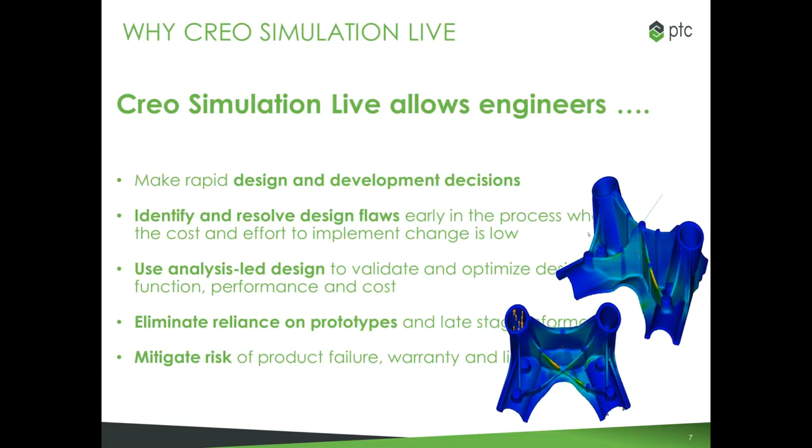What it'll give you is real-time feedback, a very intuitive, easy to use application, giving you structural, thermal, modal capabilities, giving you the ability to simulate and animate these things, see them in real time, which you'll be able to see as Terry delivers the demonstration. And most importantly, it's embedded integral within the Creo environment, but it is leveraging the Ansys simulation technology and power that it provides.

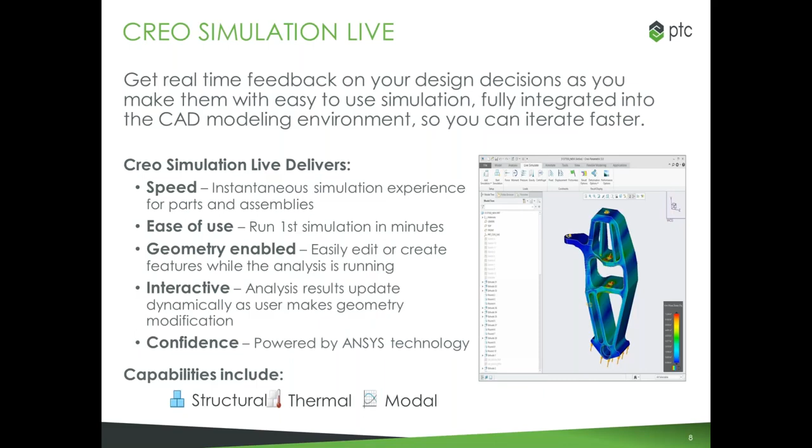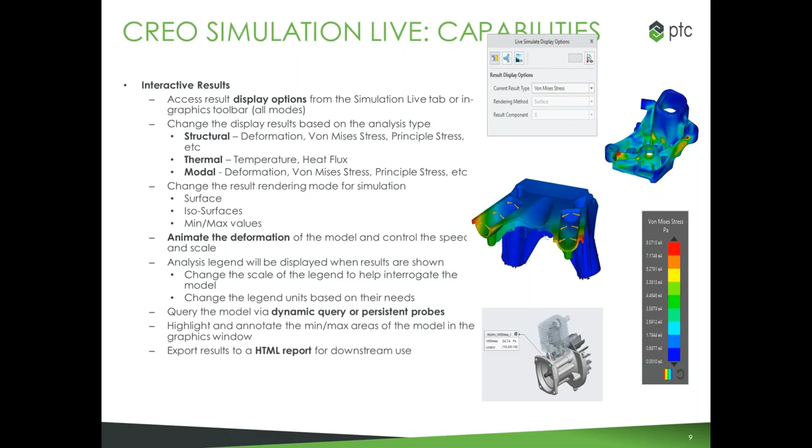I'll just build this slide out at a high level. As you can see here, some of the simulation animations, some of the still photos, but Von Mises stresses and the things that you should expect from a simulation solution capability are part of this Creo Simulation Live capability.

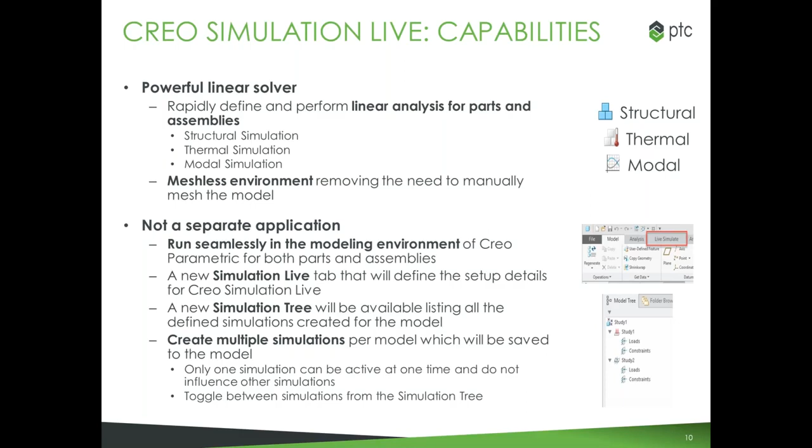It allows you to do powerful linear solving, the meshless capabilities. It shows up as a tab within the Creo environment. So as many of you are designers using Creo today to digitally design your products, you want to be able to seamlessly design your parts, assemblies, models, and go very quickly into Simulate, and then get those results real time, without having to export out or jump into another application or save files. So obviously from an efficiency and speed standpoint, it's critical that it's a tab within the Creo parametric application.

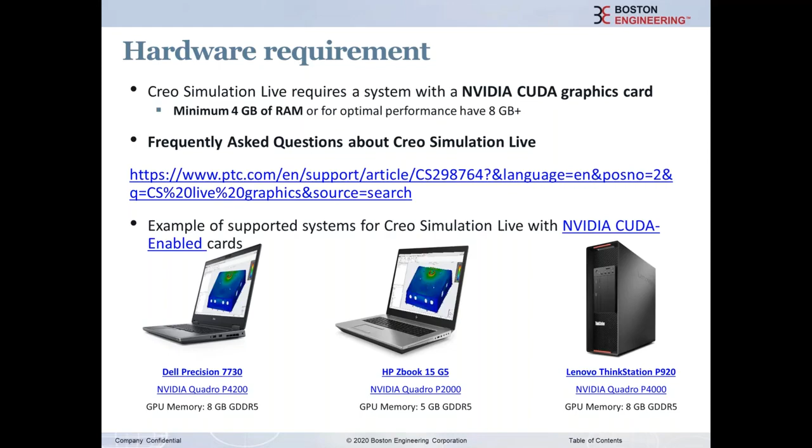As noted before, Creo Simulation Live is the first solution PTC and Ansys have brought to market. It's been well received, with a number of customers using it in production today, correlating simulations back to test data. They see the benefits in accuracy and trust, and it's bringing simulation more upfront into the design space, as opposed to the more expansive PhD-type solutions Ansys provides for customers we support. This is more purpose-built for the mechanical engineer designer.

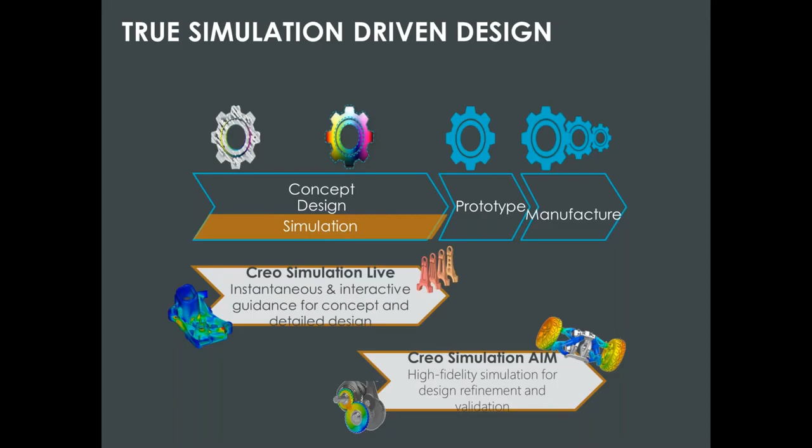Creo Simulation AIM will be coming out. As many of you know, Creo 7 will be released in a few weeks. We're excited about that, and PTC will have new capabilities and extensions available as they continue to deliver more technology. PTC's strategy on simulation is Ansys, so more to come on that.

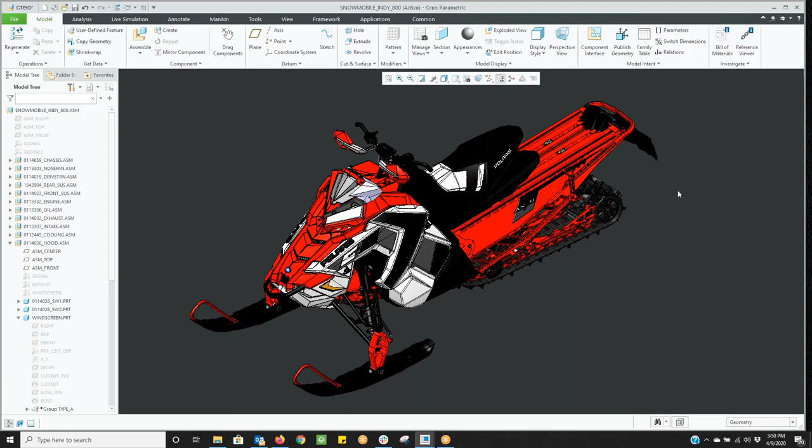We have a snowmobile. Those of us who live in the northern reaches of the world see this quite often. This is the Polaris snowmobile out of Roseau, Minnesota. We're going to go in and take a look at the chassis subassembly, and mainly we're going to look at this sheet metal bracket. We're curious as to what happens if we apply a load on the top of it.

Typically you'd do that with an analysis package, whether Creo Simulate or Ansys, and you'd have to mesh the model and apply materials, loads, and constraints. But I'm going to show you how Creo Simulation Live puts that analysis power into the designer's hands, so he can assist the true PhD analyst doing the full-blown analysis. This isn't meant to replace analysis, but it lets you do what-if scenarios quickly, instead of making a design change, running an analysis, not liking it, undoing it, making another change, and running another analysis, which takes time and effort.

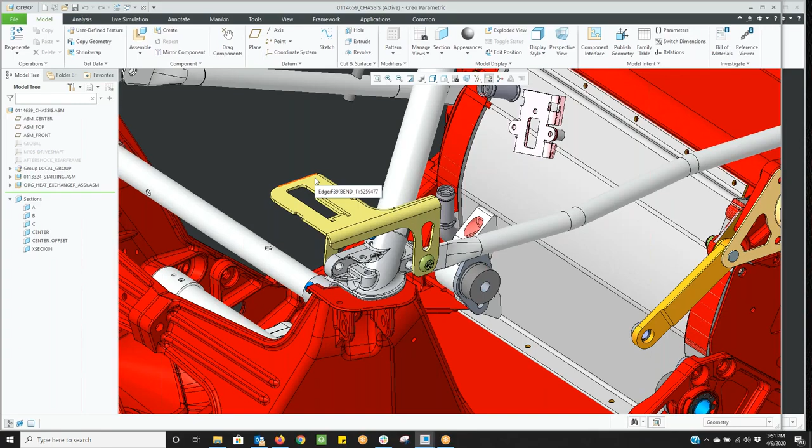So I'm going to open this. This is just a standard sheet metal part created within Creo. The material for this part was set up in the part preparation, so it already has a material assigned to it. As John mentioned, we have a live simulation tab in our dashboard, so we'll click on it, and that takes us into our Creo Simulate Live functionality.

Now if I expand this structure here, notice we're looking for loads and constraints. We need to constrain and load this model so we can get an analysis. If I click on constraints, I want to hold this model the same way it was held earlier, with 2 bolts holding it in at these locations. So we'll go in and fix those, and if I expand my constraints tab, you can see I have my fixed constraints.

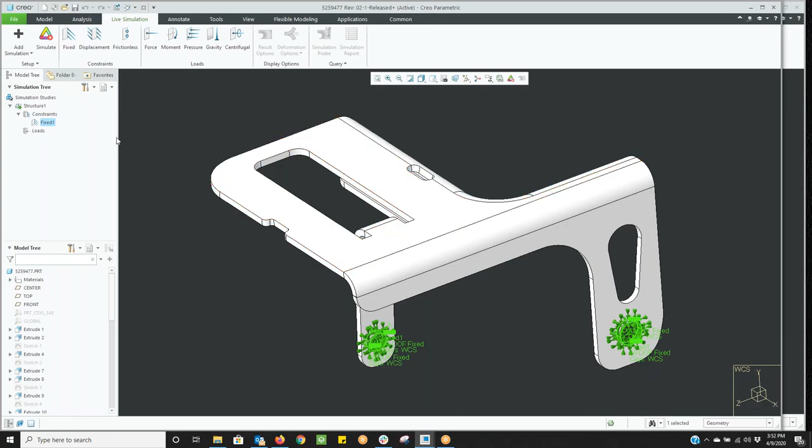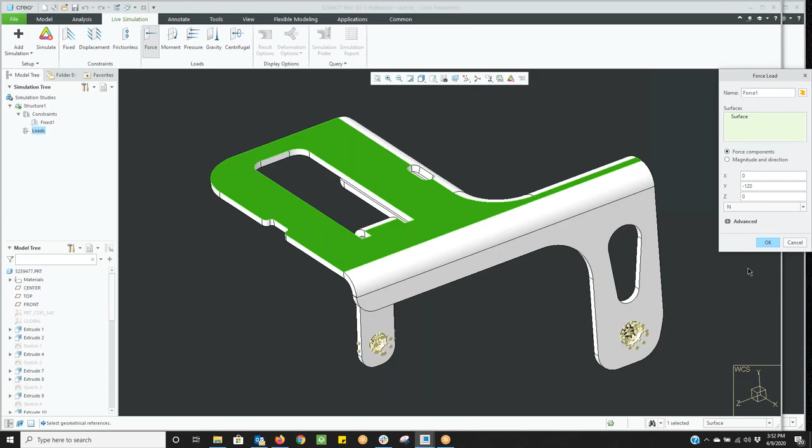Now we want to apply a load to this surface. So we click on loads, create a force, and select the surface. In the lower right corner, we have a coordinate system that tells us our analysis part coordinate system. I want to go in the Y direction, in the negative direction, so I'll go minus 120. You also have the ability to set units here, so we'll set that to newtons. We say okay, and now we have our part set out there.

It is material specified, the constraints are fixed, the loads are applied. All I have to do is come up and click on Simulate, and in a matter of about 10 seconds I have an analysis result, with a legend showing my von Mises stresses in megapascals. So I have a maximum of 126 megapascals.

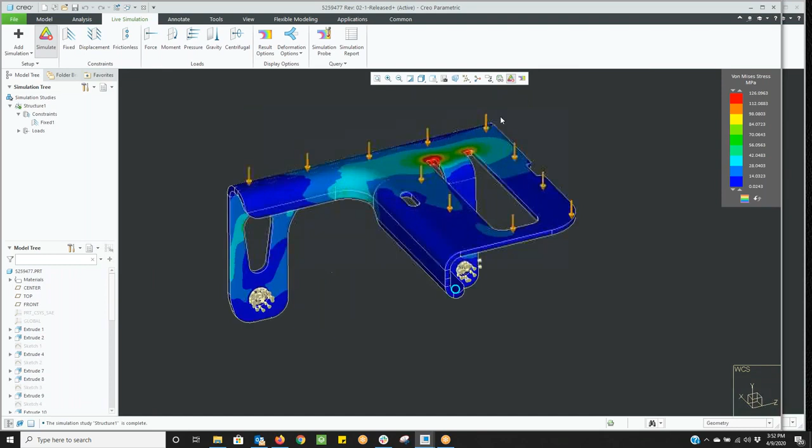I'm going to spin this model around just a little bit. A couple of things we can derive from this model, and then I'll make a couple of changes. If I go into my results options, I can go in and hit the little play button, and we can see how that model is going to deform.

You have a speed button here that you can slide to dictate how fast you want it to move. You may have something that only moves a few thousandths, which is very difficult to see. You may see the color bands changing, but you don't know how it's moving. You can go in and increase the scale. This does not change the amount, it just exaggerates it so you can see it visually. We'll pull that back. We can do a true deformation, and you can see how much it would move truly in real life.

I'll stop that, go into our results. Currently I'm looking at von Mises stress. I could go in and say I wanted to look at a deformation. Well look, out here it's moving the most, which is the furthest away from our pivot point, which is what we would expect as designers or engineers.

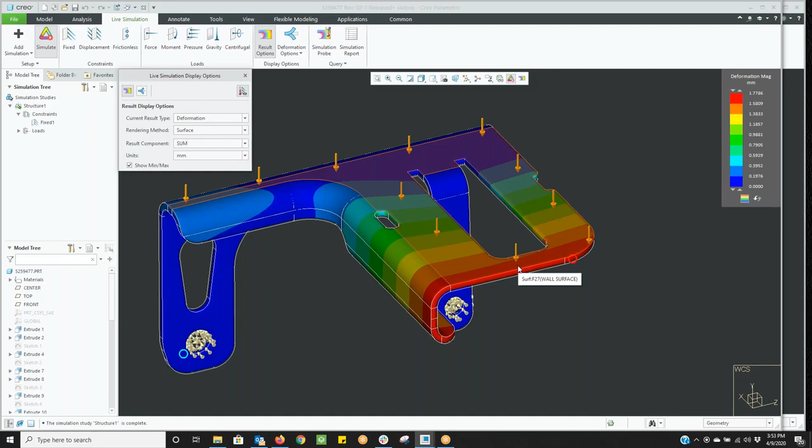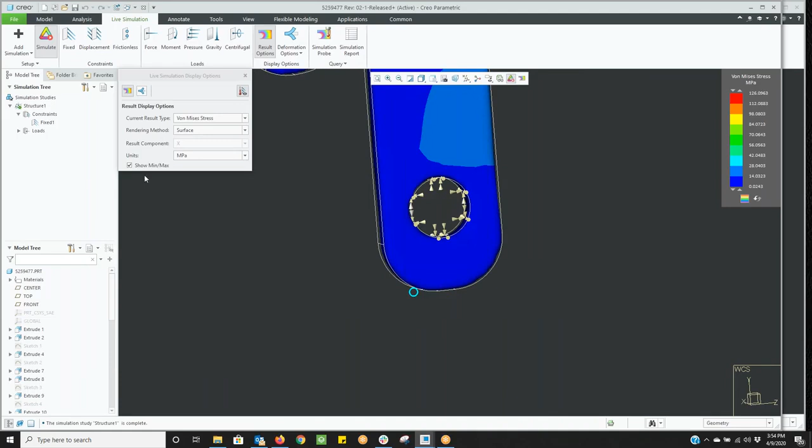I'm going to take this back to von Mises stress, and change the units to megapascals. Notice we have a button here that says show min max. We have two circles. This is the maximum value for this particular model, and down here at the bottom, as far away from it, would be our minimum. We can turn that on or off and show it at will.

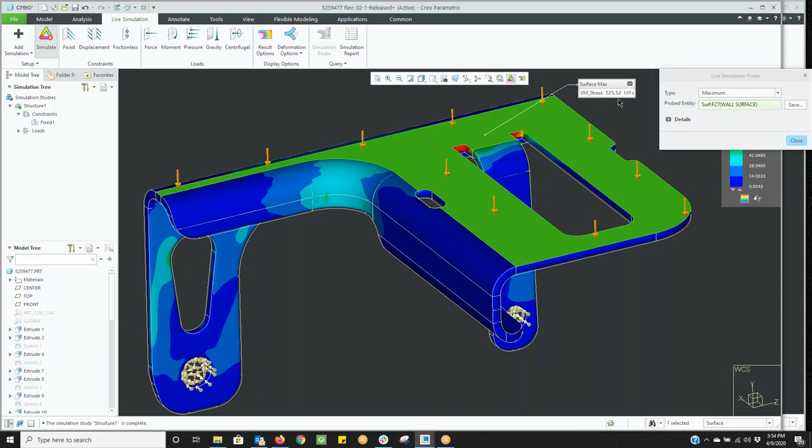So let's go make a couple of changes so you can see what happens here. We can take our simulation probe functionality, which is one of our query tools, and I can come in and say I want to see the maximum stress on this surface. Notice it gives me a value in a little box here: 125.5 megapascals. I want to save this, so you can follow along and I don't have to recreate it every single time. So I have saved that.

Now, if you notice, you have distinct color bands. I can come over into the model tree and click on my legend at the bottom, and it'll give me a blended color band as opposed to the distinct lines. That is a personal preference that does not change any of the analysis or any of the values.

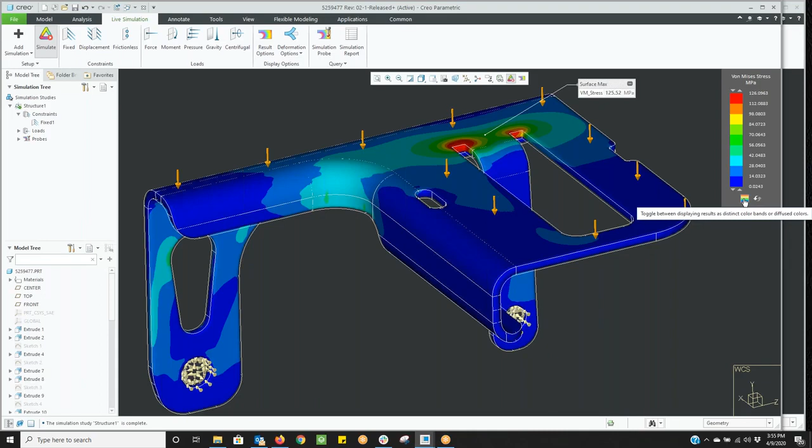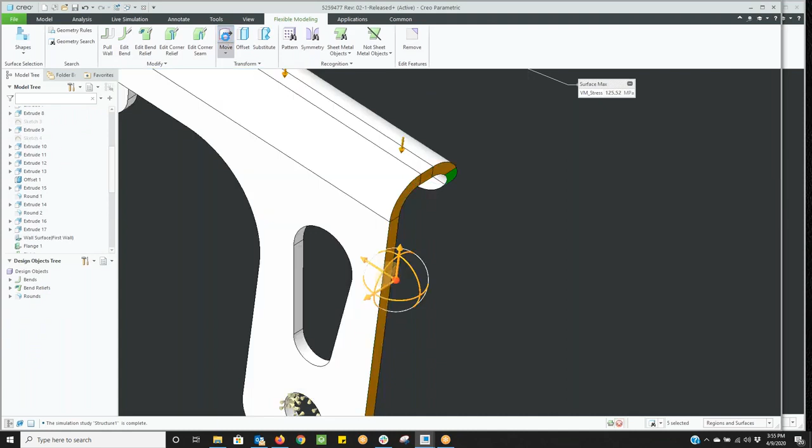The first thing we want to do is move and make this part a little bit longer. I want to add some length to this end. So I'm going to select this surface, this surface, this surface, those surfaces. I'm going to go into my flexible modeling tool and say I want to move those along this edge, and start dragging it to get a number, and I'm going to change this number to about 14 units. And I hit my OK button.

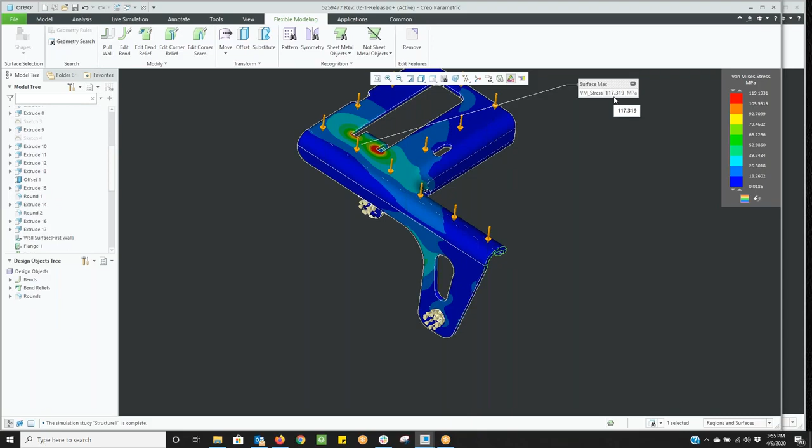Notice it changes the geometry. I've got a little new tangent here. And after it recalculates, it changes my stress. My stress was 125, now it's down to 117. So we can make those changes, and you can see those happen immediately.

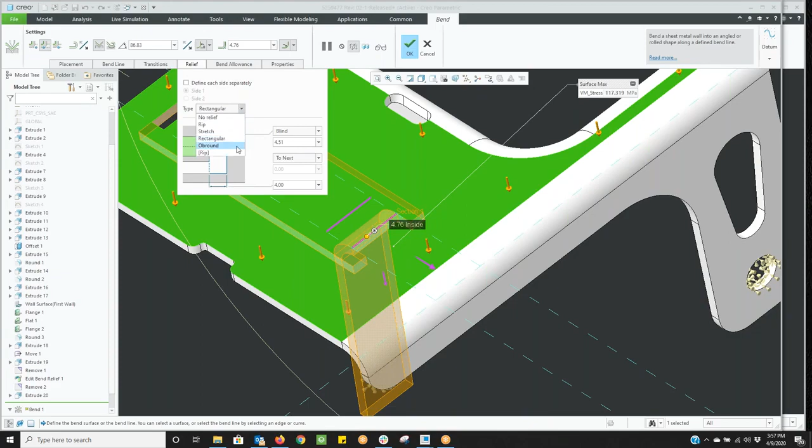One of the things we have here is sharp corners, and sharp corners cause stress concentrations, which aren't good. So let's go into the bend and edit the definition of that bend. We're going to go into our bend relief and change those from a rectangular bend to an obround bend, and we'll accept those, and it will regenerate our model. Then it will regenerate our analysis and change a little bit. Now we're changed down to 107.

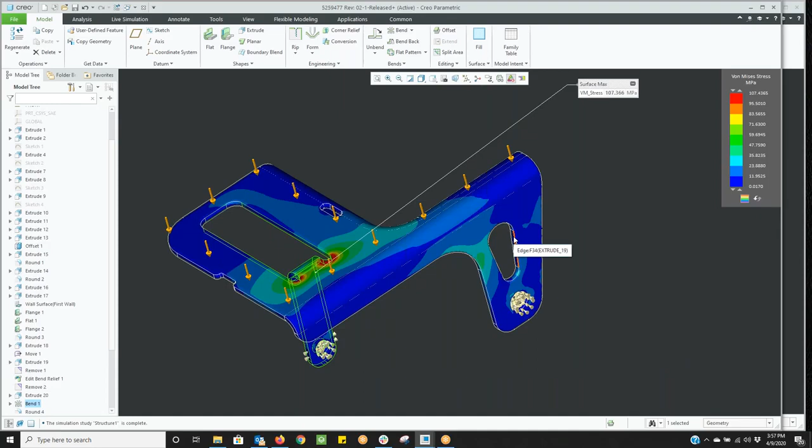Now the last change I'm going to make: this hole in the original model was there to remove weight. There's no wires going through it, there's no bolts or anything holding it together. It was there strictly to reduce weight. So I'm going to go into our flexible modeling, highlight it, and recognize that as a complete hole.

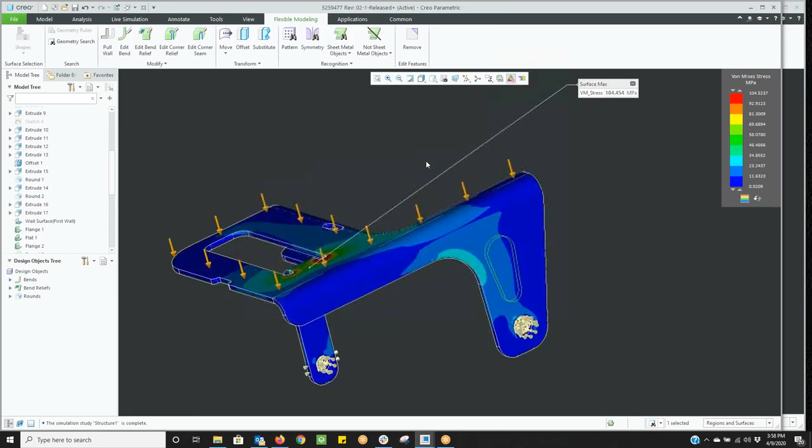And we're going to remove that hole, and we'll complete our feature. When we complete it, it has a chance to go in and regenerate the entire model, and notice that we have taken our model from 125, that it was at initially, down to 104. And it happens that fast.

In a matter of less than 5 minutes, I've made 3 or 4 changes to this model. I've lengthened it, I've removed holes, I've done this, and these changes are parametric, so as you make them, they update. If I were to go in and change the material, the values would change based on the material properties that we have.

Hi, Terry, did we lose audio? Can't hear you. I'm turning this over to Jim. Jim, are you there? Yes. All right, well, thank you, Terry. Yep, sorry about that, we'll have to clip that out.

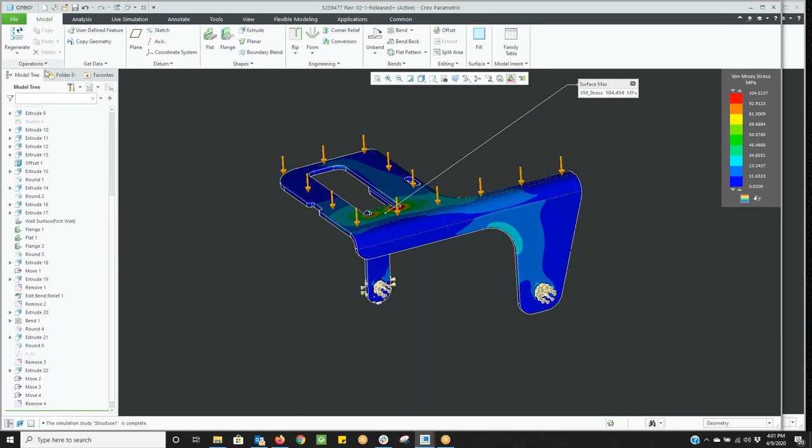Yeah, why don't we go up to File, Prepare, and we'll just show model property. We'll hit Change, and everyone will notice that sort of legacy material folder that we have in there. That's all the classic original Pro Engineer materials or Pro Mechanica materials from way back in the day. But parallel to that is a standard material, Granta Design. This is a really deep material library that Granta has partnered with both Creo and Ansys to provide a lot of precise material definitions.

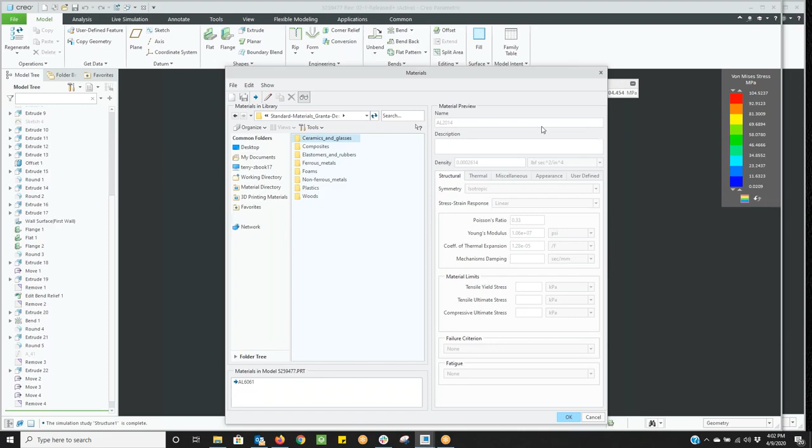So deeper bench here, a little less homework, though you still need to do some homework. There's a comment here from Gavin about linear. John had mentioned in the beginning that one purpose of this tool is to be a real quick tool, and as a result it's not a full-blown non-linear, full dynamic FEA solver. It's really focused on linear statics, modal analysis, and thermal. Terry showed us a linear static analysis.

So we really don't need a lot of material properties for linear static analysis. All we need are the Poisson's ratio and the Young's modulus. You can always go to MatWeb and download and plug those in.

The next Creo 7 is going to come out with CSL, and it's also going to include some of the fluid analysis tools. Again, it's not going to be a full-blown CFD solver like we're used to with either Simerics or Ansys Fluent. It's going to be a lighter weight tool that you can dynamically change and automatically update air and water flow. That's really neat stuff, looking forward to it. Terry, we'll do another one when the fluid comes out, right?

That is correct. We'll do another one when the fluid comes out. All right, excellent, let's see.

So there's a question here about contact. For a thorough contact analysis, we want friction and relative motion, so that's all nonlinear. Right now, the only management of contact for Creo Simulate Live is a bonded representation, which assumes all bolts are torqued, rivets are properly inserted, and there's no relative motion at the joint. We can still use CSL as a tool to make design changes up front conceptually. If it's critical to get proper stresses at a bolted joint or fastener interface, you'll go into Creo Simulate and do a nonlinear frictional analysis, or use Ansys or your FEA tool of choice. For now, the focus of CSL is to keep it up front and quick, that's one of the benefits of keeping it linear.

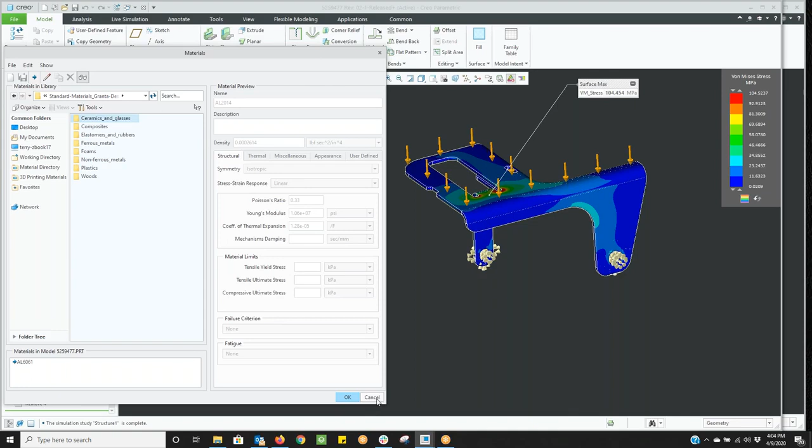Let's see what else we have here. So someone's asking, can you specify a deformation in addition to a force? Yeah, Terry, why don't we close down the materials window, go back to the live simulation tab, and take a peek at what all of our options are.

If we go over to live simulation up top, underneath the constraints we've got fixed and displacement, so that's where we can set a certain displacement. We've got frictionless, which is kind of like a planar type constraint. On the load side, we have I'd say 5 of the most popular loads: force and moment, and then pressure, gravity, and centrifugal. So we've got a combination of forces and accelerations.

For that combination of 5 loads and 3 constraints, you're probably capturing 75% of what you're trying to do in a quick linear FEA. Ansys is always developing the capabilities of the tool as customers send in requests, and Creo users are going to take advantage of that. I wouldn't be surprised if we started to see a bit more functionality based on how people are using it and giving feedback to both Creo and Ansys.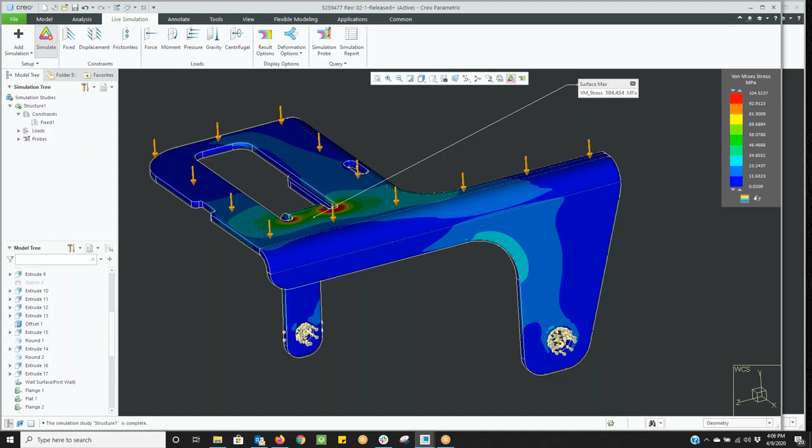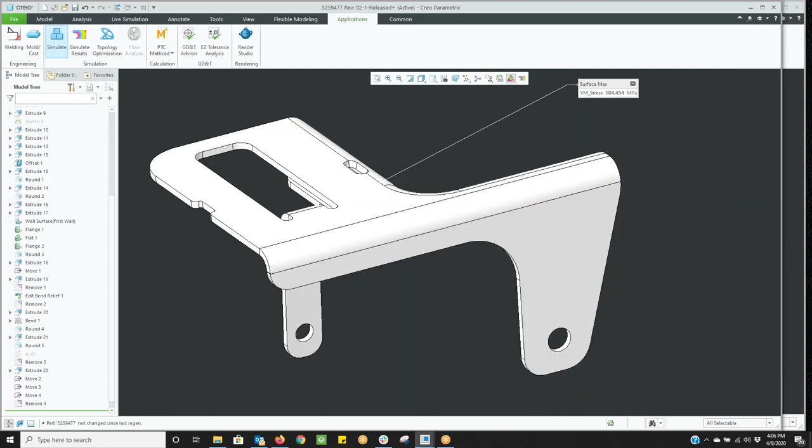So we've got a question on what's the difference between Creo Simulation Live and the analysis tab. Terry, if you click on applications, the analysis tab to the left is just some tolerance analysis and tools. But there's also a button for simulate analysis, which is the same as the application for Simulate. That's the thorough finite element analysis, the traditional mesh tool most of us have probably been using for some time. You'll have a lot more options in regards to loads and constraints, a lot more options in regards to physics. You've got thermal, stresses, nonlinear, frictional contact, full dynamics, thermal stress, so a bit of multi-physics there.

So when it comes time to do more advanced, more accurate analysis, meaning a tool that allows you to dig in when you've got test data and finite element analysis results that don't match, and you need to find out why it's not matching the test, your full-blown FEA solver like Creo Simulate or Ansys AIM is going to do that for you. CSL is not meant to do that. That doesn't mean CSL won't give you an accurate answer. If you're simulating something linear with relatively small deflections and relatively simple geometry, there's no reason you can't get test data that matches up to CSL, it's just not exactly designed for that.

I think the way this is deployed, we have a question on what we've seen from companies using this. The answer is yes, it's been deployed and yes, it's being used successfully. We've actually got a customer we were just talking to, they've got a larger team, large enough that they've got quote unquote designers and quote unquote analysts, whatever that means, and they've got full-blown Ansys.